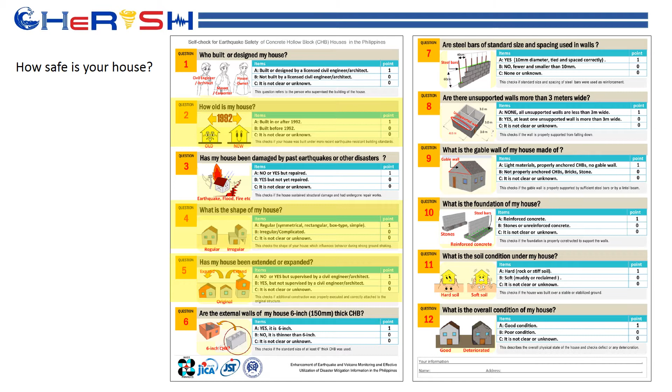At the end of the survey, an assessment is offered about how our houses will perform during an earthquake. Additionally, a recommendation is offered to make our houses ready for an earthquake occurrence. So if you get a score of 11 to 12 points, it may imply that your house is safe for now. But for verification, you are still recommended to consult experts.

If the score is from 8 to 10, it basically implies that your house might require strengthening. So to confirm this, you will also have to seek consultation from experts. And when your score for your house is only from 0 to 7 points, then you have to be alarmed. You really need to see an expert soon so that strengthening recommendations and modifications can be made.

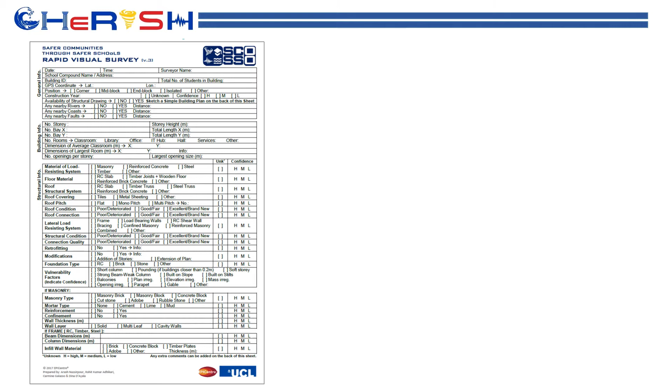Here's another example of a rapid visual survey. This rapid visual survey, or RVS, was applied to public schools in the country in a project that involves the University College of London, or UCL, De La Salle University, and Xavier University in Cagayan de Oro. DLSU and UCL are among the main collaborators of the CHeRiSH project.

So what is a visual survey? A rapid visual survey, or RVS, is an affordable and fast procedure in assessing the safety of a structure during a hazard event. It enables the classification of structure according to risk it may pose when subject to different hazards. So what's the objective of RVS?

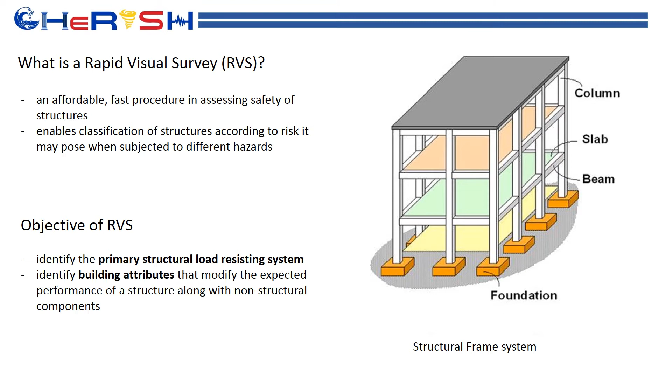It aims to identify the primary structural load-resisting system of a structure. These are beams, columns, and slabs, and foundations. It also identifies building attributes that modify the expected performance of a structure along with non-structural components.

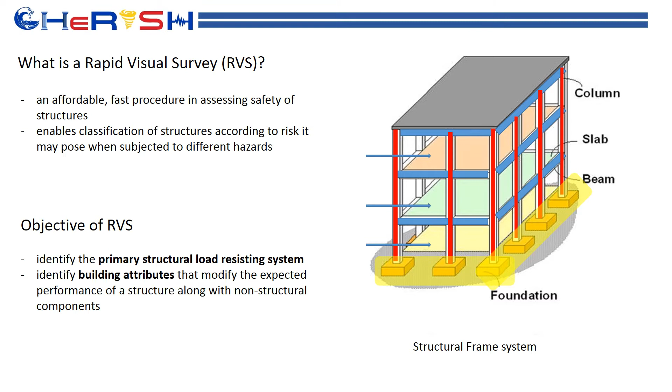So here's an example of a building attribute that affects the performance of a structure. That is the construction of a structure on a slope. Because the ground where the structure will stand on is not flat, it is required that the structure be supported by poles or long columns, and fewer slabs will rest on ground and many will be suspended.

Due to this layout and structural requirements, some columns will be sized larger than the others, and this results in varying stiffness in columns. Shorter and more stiff columns compared to long ones, the flexible ones, will attract more seismic forces and could fail during a seismic event. This attribute of a structure affects the performance and can only be identified once you have seen the structure on site.

RVS is a tool that enables you to identify these attributes and lets you assign scores to these attributes to know how much compromise they will contribute to the structural integrity.

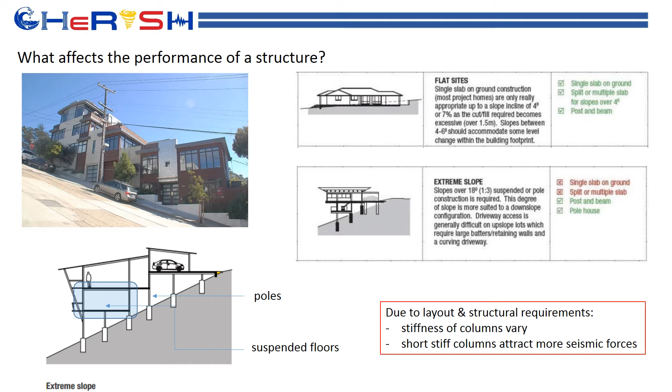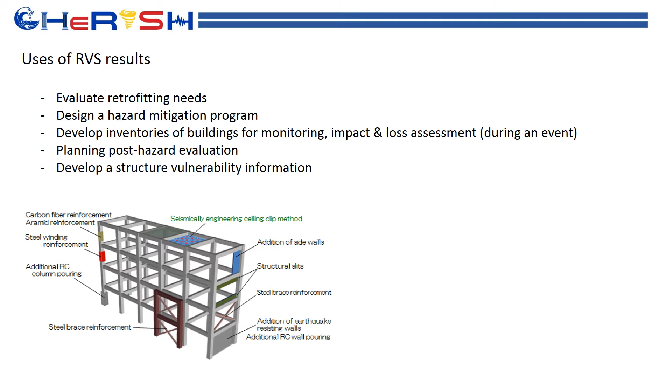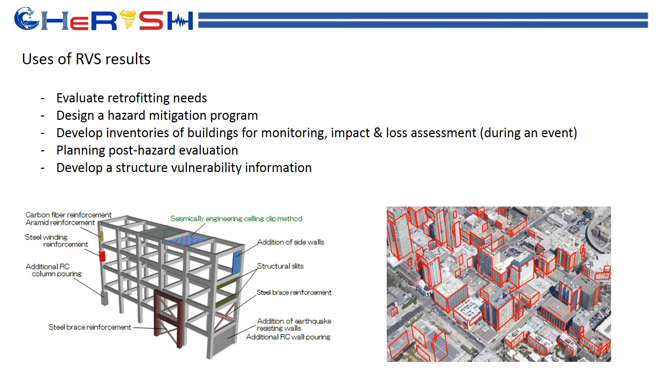RVS allows user to evaluate the needs of a structure for retrofitting, which is a performance improvement against certain hazards like earthquake. From the result of visual survey, one can develop a hazard mitigation program, create inventories of building to be used for monitoring, project impact, and conduct pre- and post-event loss assessment. One can also plan post-hazard evaluation and can develop a model for performance of structure in terms of vulnerability.

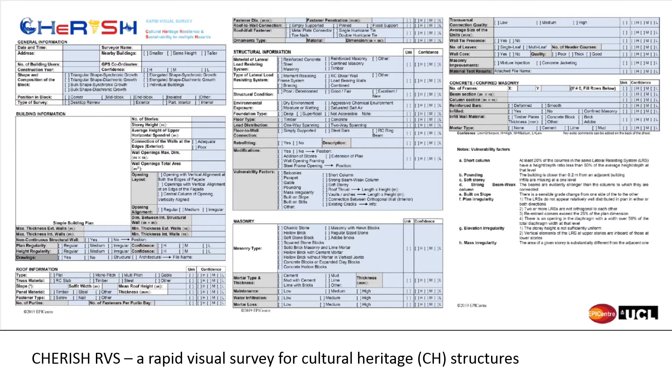CHeRiSH Rapid Visual Survey, like what you see on the slide right now, is a rapid visual survey catered specifically for cultural heritage structures. And this CHeRiSH RVS is the one that was used in conducting a rapid visual survey for CH structures in Calle Real, which was conducted in July 2019.

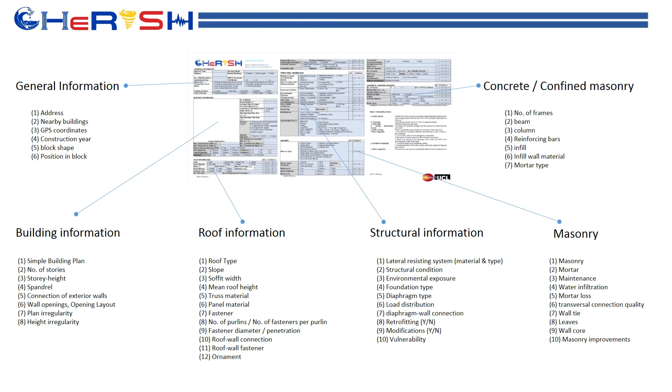So the CHeRiSH RVS has the following parts: general information, building information, roof information, structural information, masonry, and concrete or confined masonry. General information aims to identify and locate buildings, which is an important basic information.

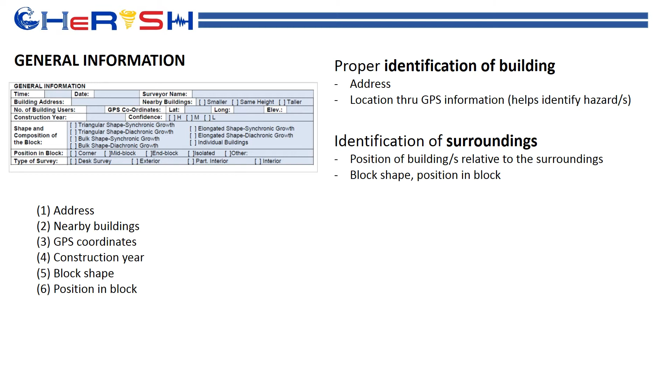This can be achieved by providing the address and the location through GPS. Surroundings must also be described, such as nearby buildings, description of buildings adjacent to the structure being assessed, block shape and position on the block, and determining the time of construction. Some of this can be done before going on site.

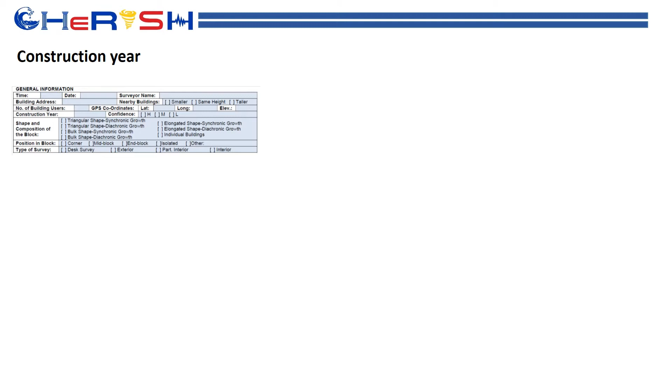Construction year. The age of the building is tied to design and construction process or practices. By knowing when a building was constructed, one can tell the basis for the design of the structure. One can also identify the construction process during the time of construction. By knowing this crucial information, an expert can determine if a structure is adequately designed to withstand a particular hazard, such as earthquake. The demand from a structure for an earthquake, for a structure constructed before 1970, is different from a structure constructed recently. So all structures must be evaluated based on the demands of loads, based on the current code.

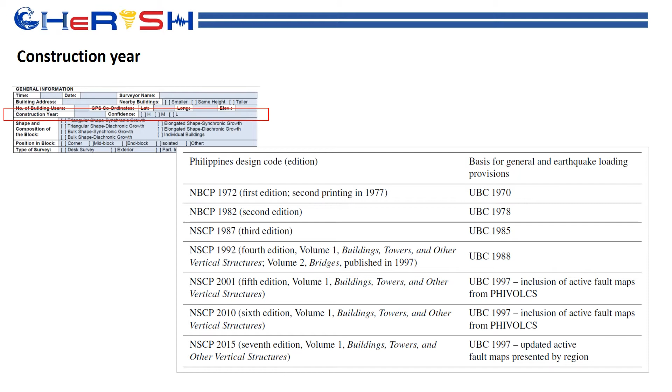Block shape. This information confirms the address or location of the site. This also provides information that can support items in the latter portion of the RVS, for example, pounding due to adjacent buildings.

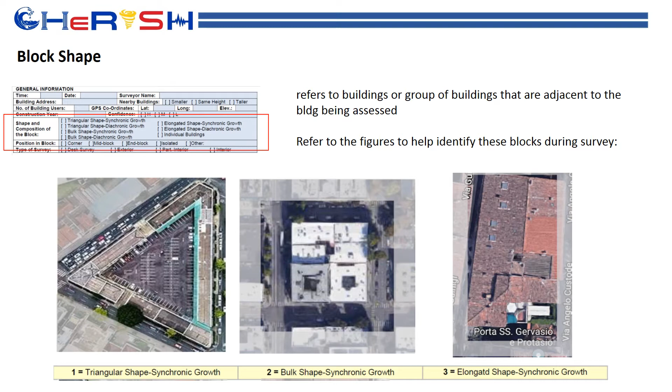If the buildings are constructed individually and separately, then you can also identify that to be individual buildings, under classification number 7. So you can use the following visual aids to answer this particular item.

Next is building information. This information requires a simple building plan, number of stories, story height, spandrel, connection of exterior walls, wall openings, opening layout, plan irregularity, height irregularity. This part provides an overview of building configuration, like how tall the building is, how the building looks when viewed from above, whether there is plan irregularity, etc. It also identifies building attributes which can be observed from the street that affect the performance of the building, for example, opening layout, facade irregularity, height irregularity.

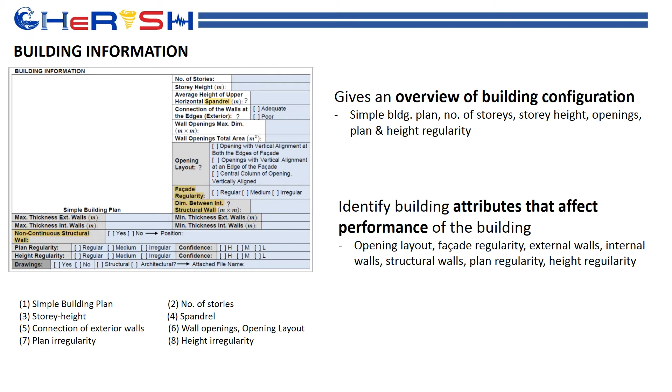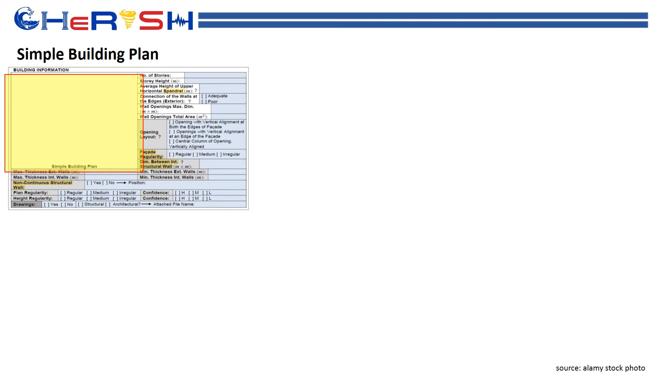Simple building plan. This could be a skillful sketch of a building or a simple floor plan drawing, but both share information that reveals some of the basic geometric features of the structure, which may have an influence on structural performance.

Stories or story height. The number of stories or story height has to do with the height of the building, of course. Damage to a building is somewhat influenced by its height, and this information is a good indicator of a building's height.

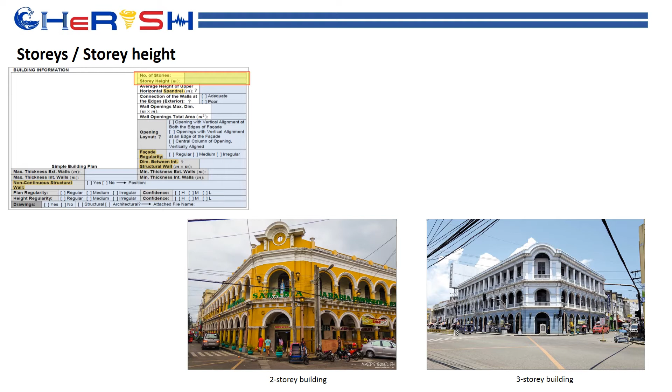Spandrel. Spandrels are technically beams. In areas where there are openings, spandrels are the ones carrying the weight of walls above the openings. Without it, walls will have no support and could fall off. So how to detect it? Find a portion of the masonry wall between two vertical openings, the one that connects two vertical piers — most likely that will be the spandrel.

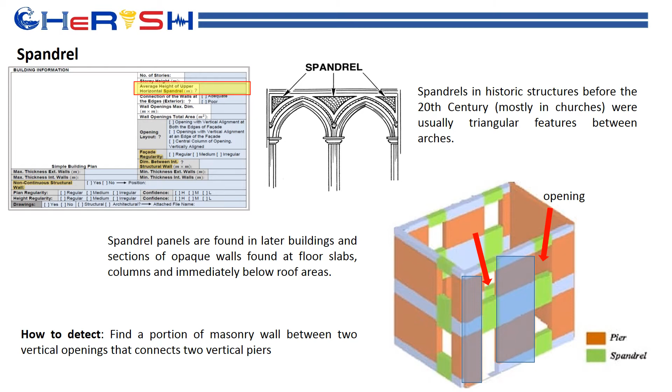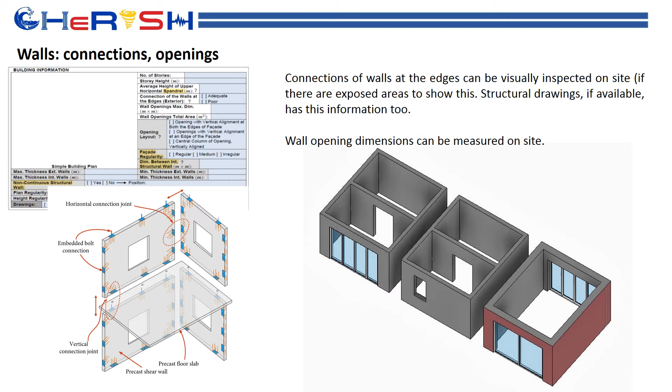Walls, connections, openings. Connections of walls at the edges can be visually inspected on site if there are exposed areas to show this. Structural drawings, if available, have this information too. Wall opening dimensions can be measured on site.

Facade is the front face of a building. A facade is said to be regular if the spacing between windows and door openings is equally spaced apart.

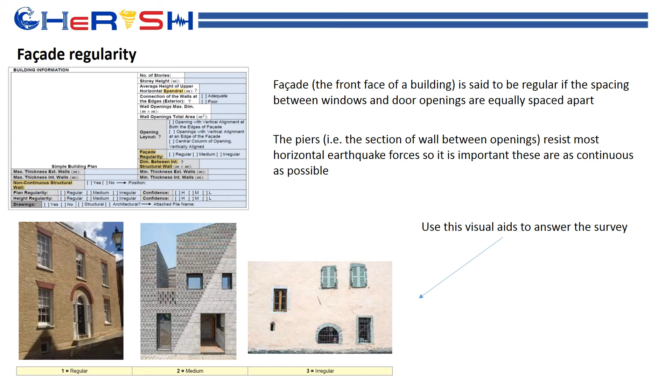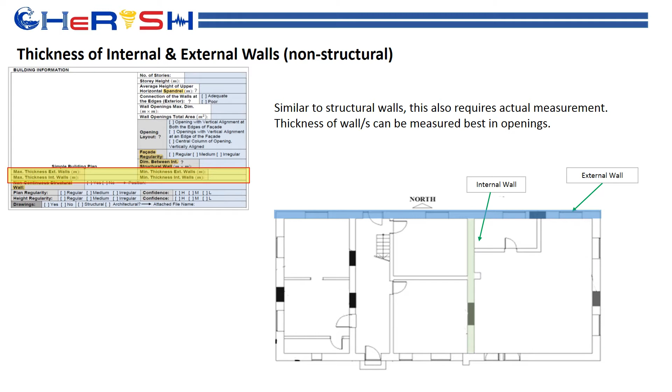External walls run along the periphery of the structure, while internal walls normally set the partitions in a building. This item requires the thickness of these two components. Note that walls can best be measured at openings, for example doors. When you open a door, a portion of the wall gets exposed and you can measure the thickness from there. In windows, walls can also be exposed in those areas, so you can also measure the thickness of the wall from openings like windows.

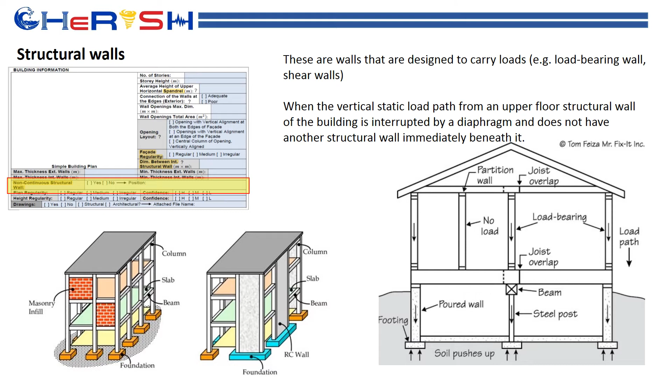Structural walls are walls that are designed to carry loads, examples of which are load-bearing walls and shear walls. This item seeks to identify if there are vertical static load paths from an upper floor of the building that is interrupted by a diaphragm and does not have another structural wall immediately beneath it. Take a look at this figure. When the vertical static load path from an upper floor is interrupted by a diaphragm, as seen in the picture on the left, and does not have another structural wall immediately beneath it, as illustrated by the picture on the right, you will have to answer this portion in the RVS. You can refer to this visual aid to say whether the structural wall is continuous or not.

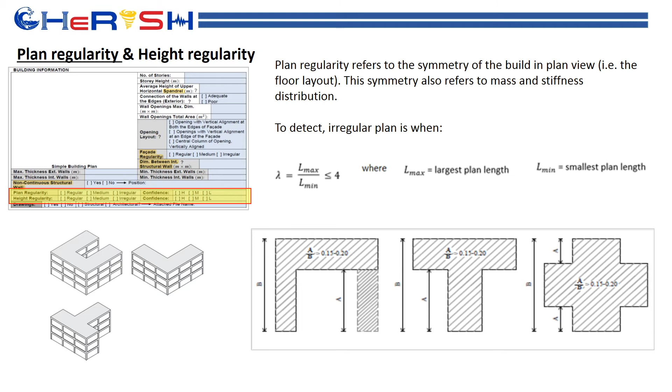With respect to height regularity, similar to facade irregularity, there should be no disruption due to irregularity or discontinuity of vertical structure layout. This irregularity can be assessed based on the elevation view of the building and consistency of mass and stiffness with height. To answer this portion in the RVS, you will say either it's regular, medium, or irregular. Regular is where story heights are uniform in a building. Medium is when story heights are different, with the difference between floor heights less than 0.5 meter. But it is considered irregular if the difference between floor heights exceeds 0.5 meters.

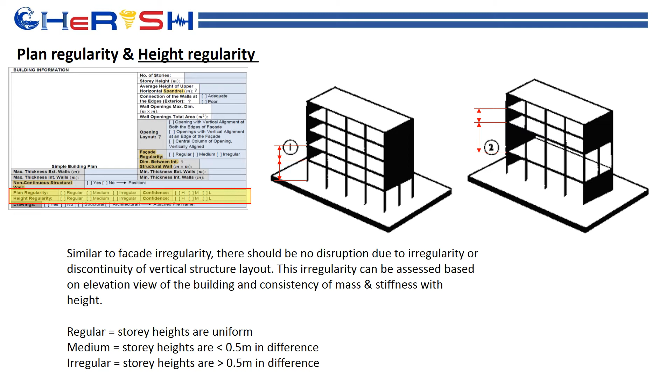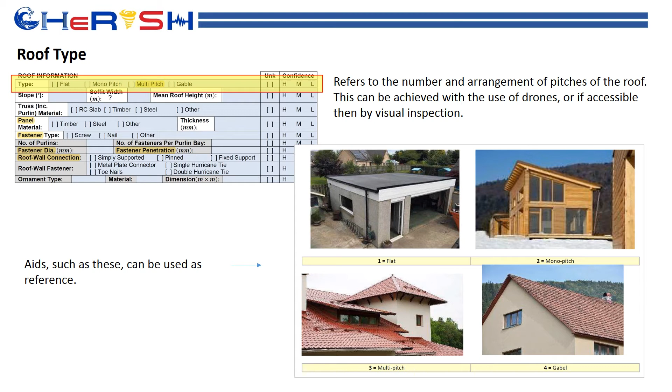The first item being asked in this portion is the roof type. You will answer this item as the roof being flat, as shown in this figure, or mono-pitch, meaning the inclination of the roof is only on one side. But if it is on several sides, then the roof is multi-pitch. And lastly, if it looks like this in figure 4, then you say gable. So visual aids such as this can be used as a reference. Answering this item can be achieved if accessible by visual inspection. Otherwise, you may use pictures taken by drones and judge from those pictures the type of roof that a structure has.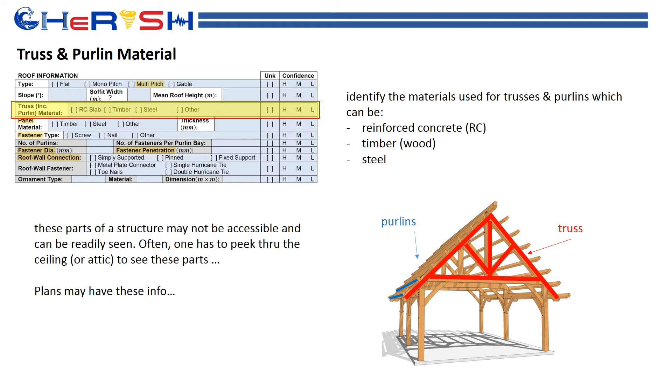For the panel material, this item identifies the material used for roof panels, which can be timber or steel like GI sheets or others, because some use solar panels for their roof while others use clay tiles.

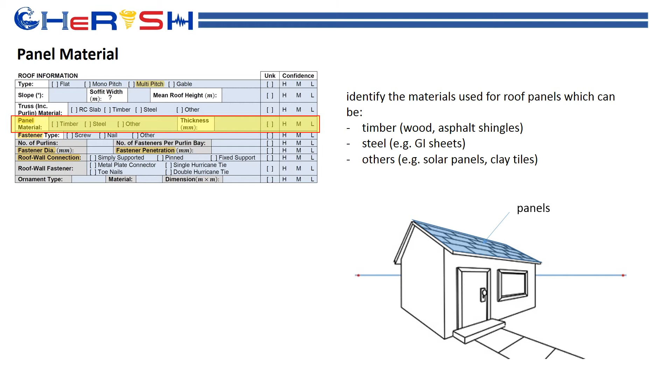Fasteners are tools that connect the components of roof. So GI sheets get connected to purlins by fasteners. Fasteners can be screws, they can also be nails.

Inspecting this may require access to the roof. So it will be more convenient if plans are available, because you will simply have to check those materials from the plans.

But when accessible, one can check the size of these fasteners, and you may be able to correlate the size with the depth of penetration that these fasteners go. So that's how to answer this particular portion of the RVS.

For connection of roof to the wall, it describes the level of fixity of roof to wall through the type of connection. Timber truss is usually pin connected. So if the truss used in a structure is made up of wood, then its connection will be described as pin connected

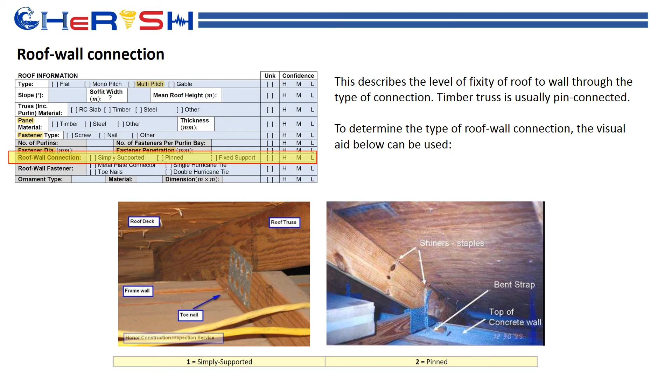Roof-wall fasteners. This pertains to the material used to connect or fasten the roof to walls. To determine the material used, the following visual aid can be used. This can be inspected through the attic or ceiling, but may require permission from the owner. The difference of this from the previous item is that this identifies the material used to fasten the roof to the wall, while the previous one identifies the type of connection—whether it's simply supported, pin connected, or fixed supported.

And then lastly, for this section, the ornaments. Ornaments are typical for cultural heritage structures. This feature, however, poses risk because during an event, let's say an earthquake, these ornaments may fall and may pose risk to

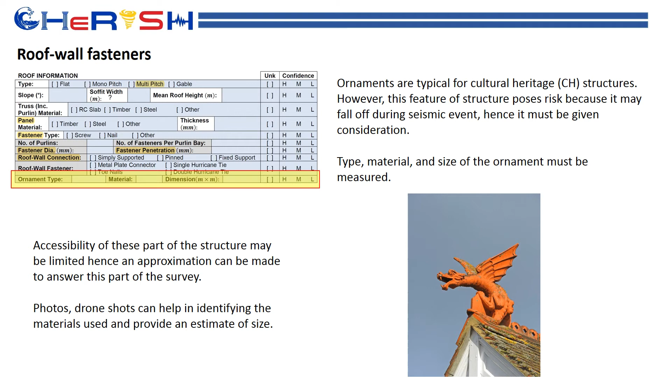So structural information, this aims to identify the structural system, which could be the lateral load resisting system and the material used for this. It also identifies the attributes that affect structural performance, such as the condition of the structure, the type of foundation being used, if there are diaphragms, and the way that these diaphragms transfer loads to adjacent beams, connection of parts, and vulnerabilities.

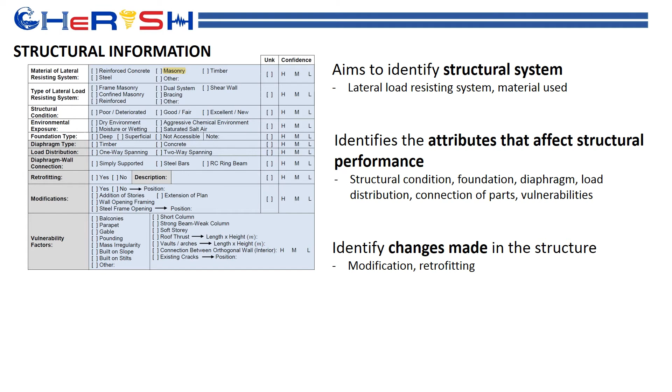It also aims to identify the changes made in the structure. Has the structure been modified? Has the structure been retrofitted? So this particular section will be aiming to answer those items.

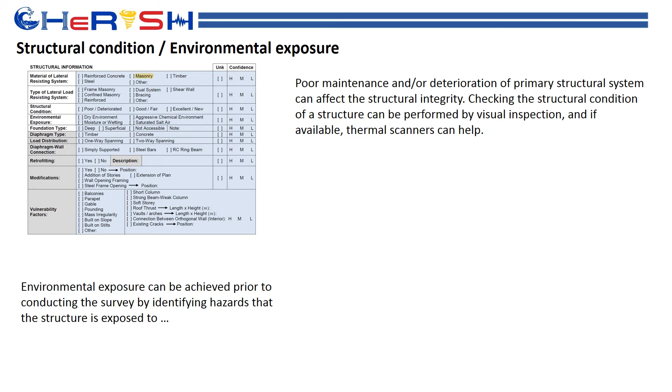For structural condition and environmental exposure: poor maintenance and deterioration of the primary structural system can affect structural integrity. Checking the structural condition of a structure can be performed by visual inspection, and if available, thermal scanners can help. Here's a visual aid. This visual aid can help us assess this part. One can tell whether the deterioration will significantly affect the performance, or it will only moderately affect the performance, or will not affect the performance at all.

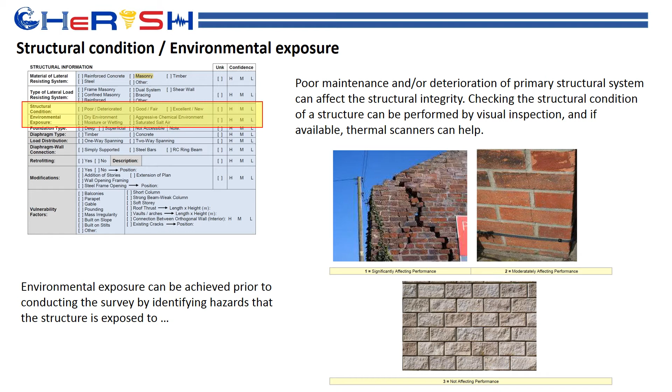Environmental exposure, on the other hand, can be assessed prior to conducting the actual site survey, as hazards can be identified through desktop survey. Nearby main water source can be identified. Distance from fault line can also be identified prior to on-site inspection.

Foundations are structural members that transmit the loads carried by the structure to the ground where the structure sits. So depending on soil quality, foundations can be shallow or deep. This may not be visible on site, but if plans are available, one can tell the foundation type. Diaphragms can be identified through site inspection and similarly, if available, through plans.

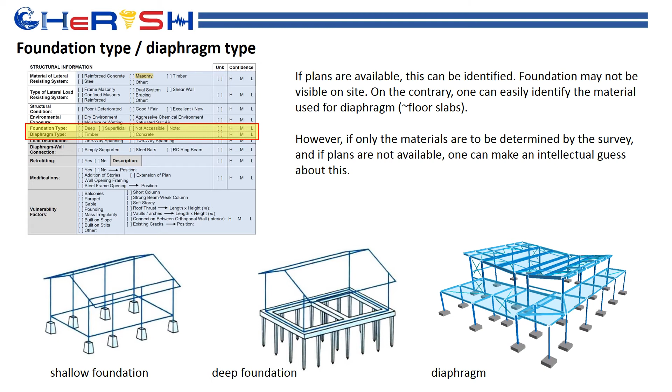Load distribution concerns how floor loads are distributed to the nearest or adjacent beam. Load can be directed in two directions - we also call it two-way slab - or through one direction only. So this can be determined by visual inspection if dimension length disparity is obvious, but a simple calculation can verify if the slab is one-way or two-way.

Take a measure of the dimension of the slab along the longer direction compared with the shorter direction. If the ratio between the longer direction and the shorter direction exceeds 2, then the slab is categorized as one-way, and the manner that this type of slab distributes the load to the beam is through one direction only. Otherwise, it's a two-way slab.

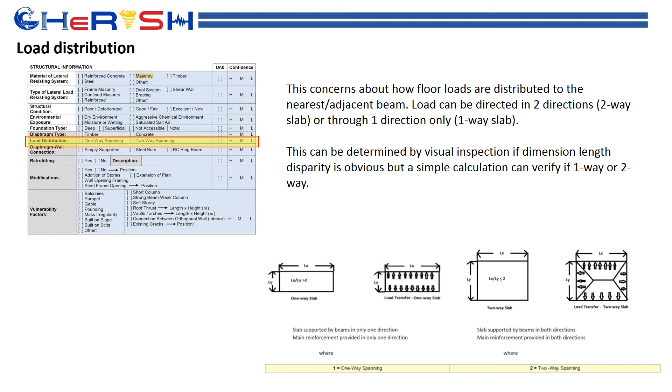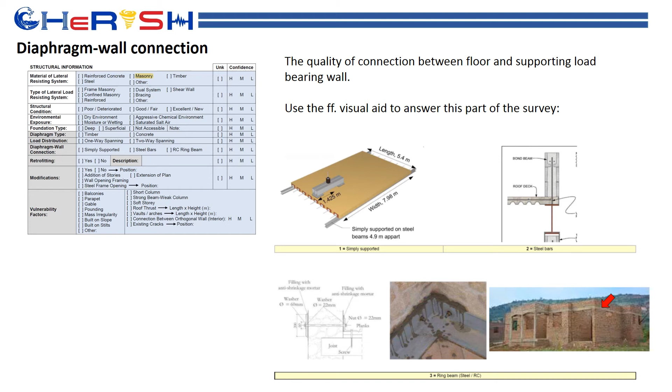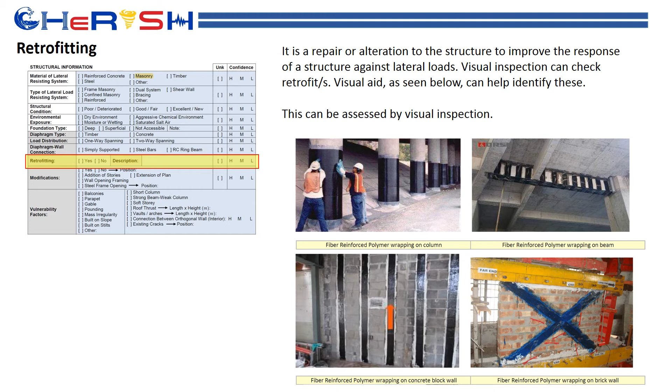Modifications, unlike retrofits, are additions to the structure, but they don't have the intention of improving the response of a structure against loads. In fact, many of these modifications even compromise the integrity of the structure. These modifications can also be assessed by visual inspection, and we might be able to see some of this.

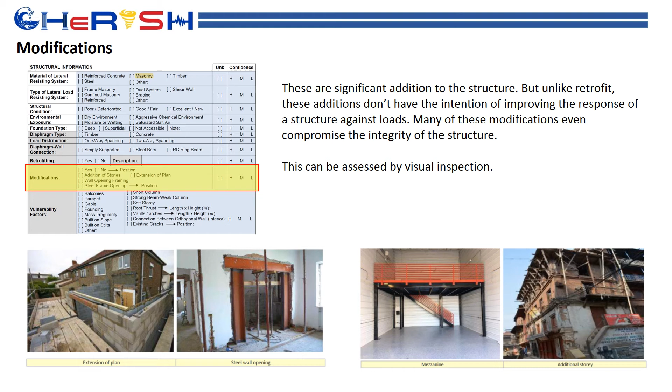Examples include extension, opening on walls, addition of mezzanine, and addition of a floor or story.

Vulnerabilities are considered to be the weak aspects of normal construction techniques that will compromise the integrity of the structure when subject to lateral forces. One can detect this from architectural or structural plans or by conducting visual inspection. Some of the vulnerabilities taken into consideration in this rapid visual survey are the following: a balcony,

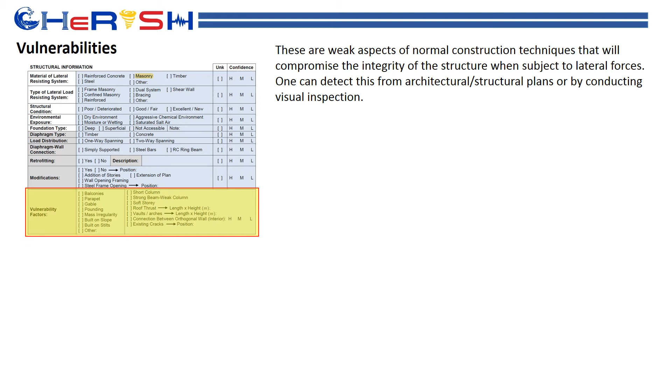parapet. A parapet is a portion of exterior walls that extends above the roof. This can break during an earthquake and may fall on the roof or onto the street.

Gable walls are normally not braced, therefore vulnerable to out-of-plane failure. These walls provide support for the roof, and their failure can result in partial collapse of the structure.

Mass irregularity: for example, if a particular story is being used for storage compared to other floors which don't have the same function, there's a difference in mass between that specific floor compared to others. That is considered to be a vulnerability. And structures built on stilts.

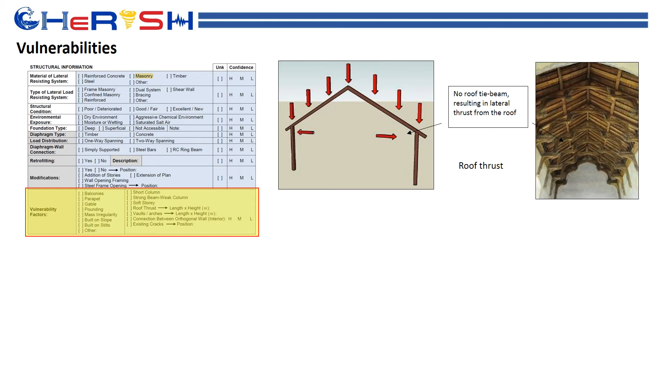Additional vulnerabilities could come from roof thrust, as shown here in the picture above. Roof thrust happens when there's no roof tie beam, no beam that connects trusses. Without these tie beams, lateral loads are additionally applied to columns as a result of this thrust from the roof.

Vault or arch is also a vulnerability, and so is the connection between orthogonal walls. If the connection is bad, then that's a vulnerability. Otherwise, the connection is okay. But there's a need to identify whether the connection is bad or good.

Cracks are a manifestation of an impending failure of a structure, so it is important for us to identify this, including the locations. Cracks are more critical if they occur along structural members. But if cracks are present along or on walls that don't function structurally, then they can be repaired.

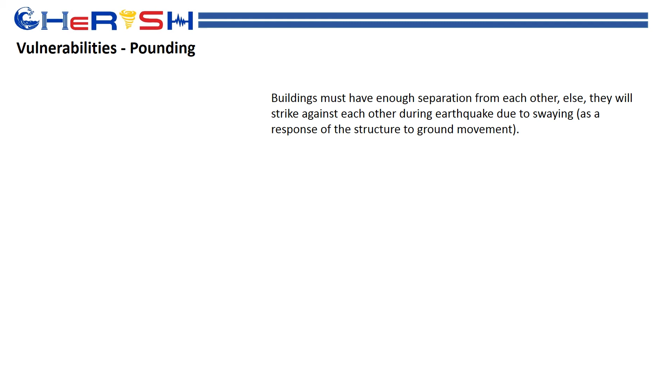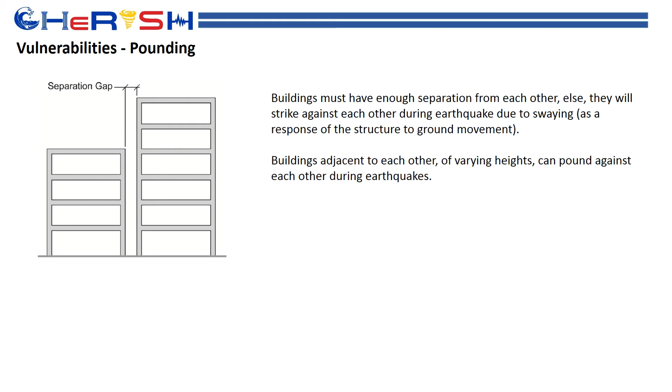Another vulnerability is pounding. Buildings must have enough separation from each other, else they will strike against each other during an earthquake due to swaying as a response of the structure to ground movement. Buildings adjacent to each other of varying heights can pound against each other during earthquakes. Pounding must also be considered if buildings are at the end of the block.

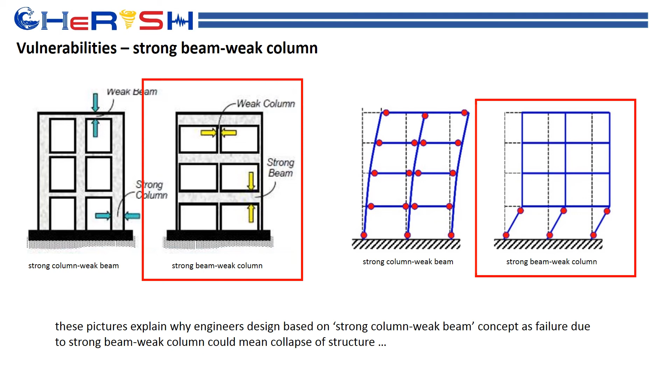When one floor is weaker, that means that floor is less stiff than others. It can be manifested by having fewer walls or columns compared to other floors. So that will be classified as a soft story. We have here several pictures that describe a soft story.

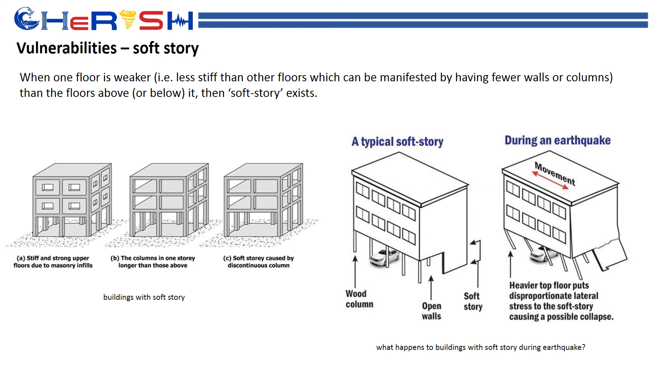So what happens to buildings with a soft story during an earthquake? This picture on the right depicts the response of a structure with a soft story during movement in an event of an earthquake. Because top floors are heavier, it puts disproportionate lateral stress to the soft story below, causing a possible collapse.

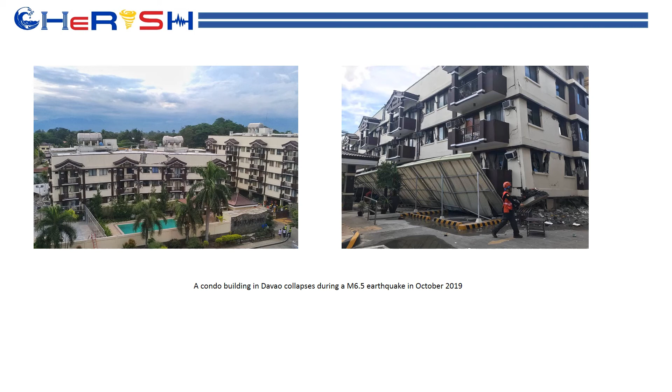So these are actual buildings that collapsed during earthquakes because of soft story. We don't have to go far, as one condominium building in Davao collapsed in October 2019 due to soft story as a magnitude 6.5 earthquake hit the province. I'm sure you have heard about this on the news.

Another section is about masonry. It identifies the material used for masonry, such as masonry mortar. It also identifies the condition of material used for masonry. To identify the condition, it checks for maintenance, water infiltration, mortar loss, improvements, and material testing conducted. It also establishes the degree of anchorage, the amount of connection of masonry to the building, asking about the connection quality and if there's a presence of wall ties.

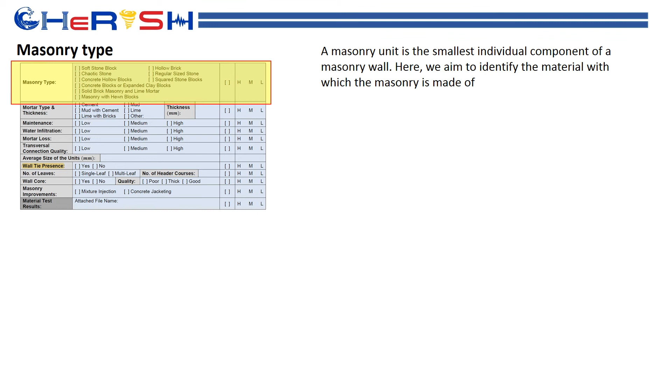So masonry type. A masonry unit is the smallest individual component of a masonry wall. Here we aim to identify the material with which the masonry is made of. It can be a soft stone block, chaotic stone, regular sized stones, concrete blocks, or expanded clay blocks, among others.

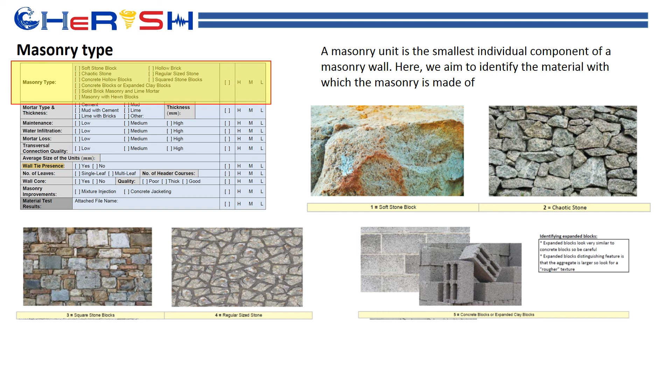Typically in the country, we're using concrete hollow blocks. But for cultural heritage structures, structures could be made up of hollow bricks or solid brick masonry and lime mortar, and then masonry with hewn blocks.

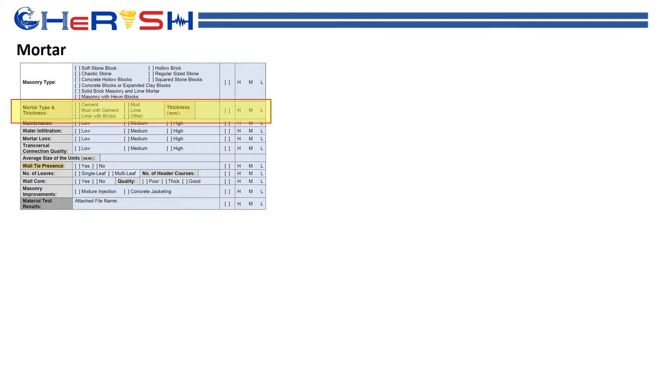So mortar will ask about what type of material is being used as mortar. Mortar is used to fill the gaps between bricks and blocks. It is a mixture typically of sand and a binder such as cement or lime, then added with water and applied as a paste, which then sets hard. So mortar can be cement, mud, or lime.

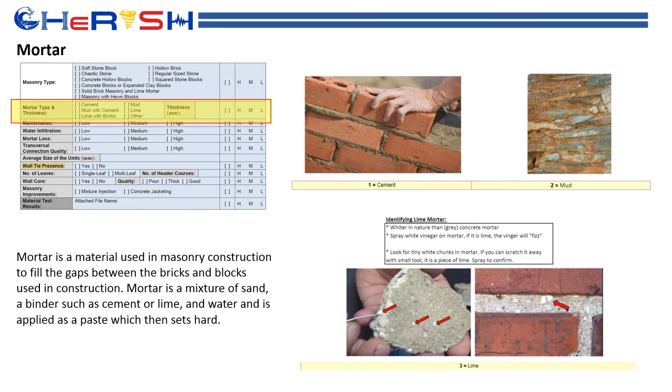Unless a maintenance record is available, maintenance can be judged by simply visually inspecting the target structure. One can judge easily if a structure is well maintained, not well maintained, or deteriorated. So you can say maintenance is low, medium, or high for this particular item in the RVS.

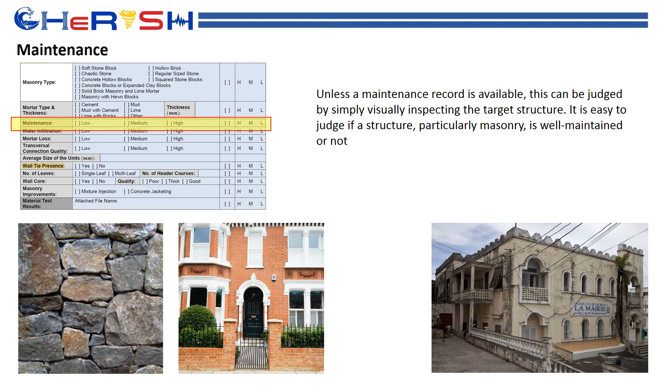Water infiltration is the amount of water that seeps through the building envelope to the interior of the building. Visual aids such as this can be used to identify the areas where water infiltration has occurred. You might be able to observe painting or coating damage, water stains, loose cladding, rotting trim, falling debris, cracking or spalling, and efflorescence.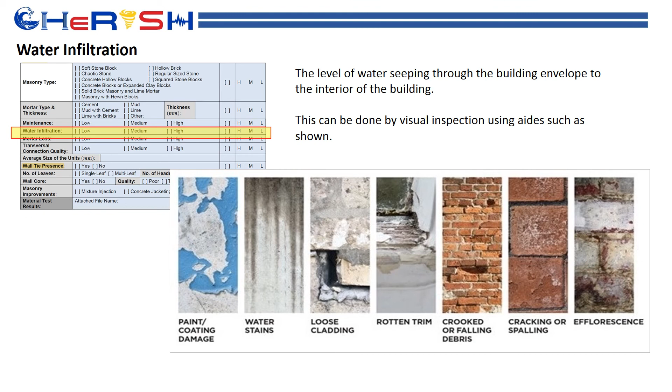The transversal connection quality, including wall cores and masonry improvements, for masonry walls with multiple leafs, cavities, or infilled core or layer, refers to the connection between two leaves or two layers of the wall. This can be through grouted steel pin, header course between the leaves, tie rod, or wall ties.

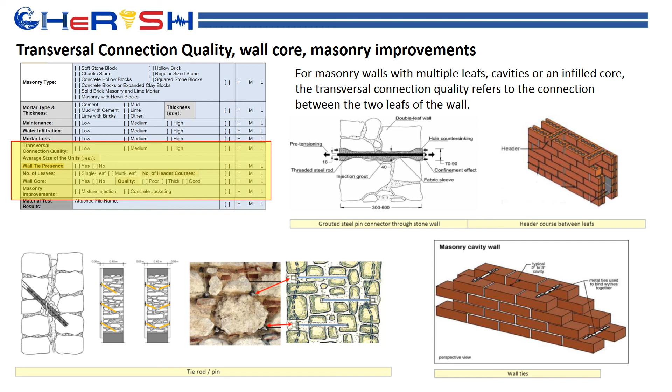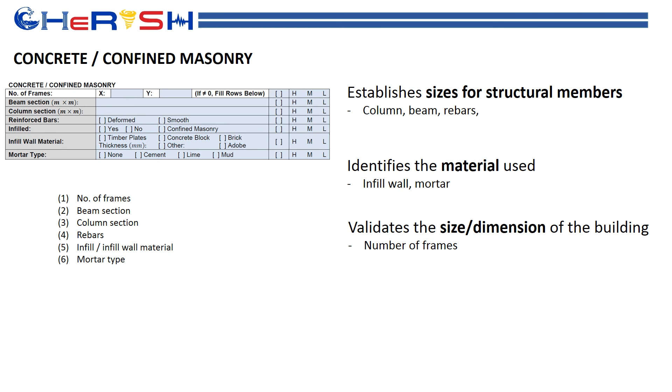And the last section is about concrete and confined masonry. Here it establishes the size of the structural members such as columns, beams, and the reinforcing bars used. It also identifies the material used for infill wall or mortar, and then validates the size or dimension of the building by asking about the number of frames.

But before we start with the components of this particular section of the RVS, let's differentiate concrete versus confined masonry first. Confined masonry is a construction system where the walls are built first and RC columns and beams are cast afterwards, while typical in our country is when the RC frame is constructed first, so the columns and beams are constructed before the walls.

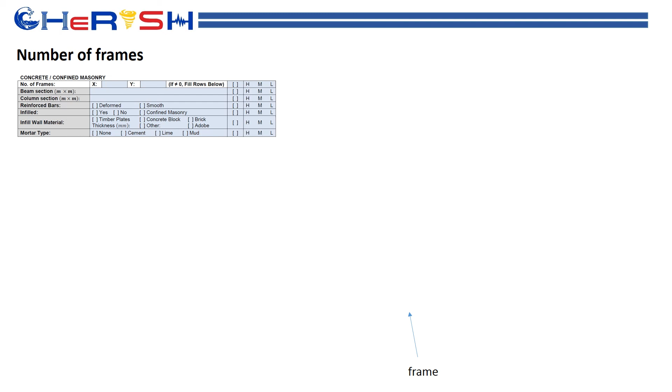For the number of frames, this is a structure that will be used for us to define what a frame is. Under this section, the first item is about the number of frames. Simply count the number of frames during inspection. For this particular example, we have 1, 2, 3, 4, 5, 6, 7 frames.

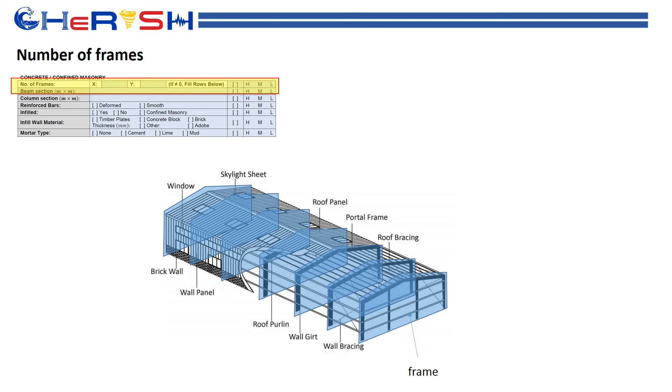Now for beams, columns, and rebars, dimensions of beams and columns can be measured on site if plans are not available. To determine if rebars are corrugated or not, one can check the structural drawing. Observing this on site may be difficult, so the size of the rebar can be checked from the structural drawing, but the presence of corrugation requires physical inspection. It might be difficult to observe this on site unless the structure is heavily deteriorated, such that a portion of rebars in some structural members are already exposed.

Regarding infill walls and mortar type, infill walls in the country are typically concrete hollow block walls. Though for cultural heritage structures, some may have used bricks or adobe, but these are typically considered non-structural. As differentiated earlier, confined masonry versus RC frame with masonry infill, we can answer whether the structure is infilled or not. The material used for infill can be determined through inspection, and similar can be said about mortar type.

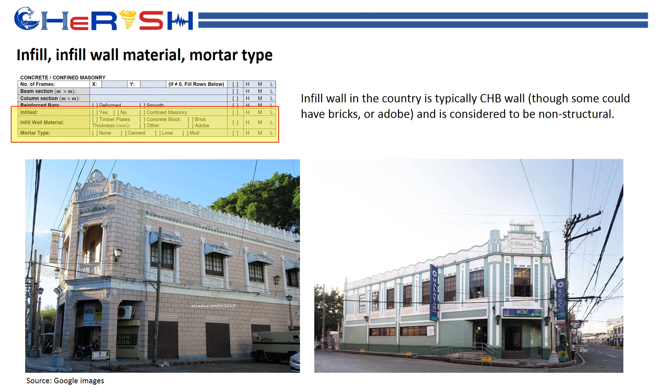So here is an example of a rapid visual survey for one of the structures in Calle Real. The building is identified to be 1001. I have made a mistake here - this sample RVS is not for 1013, but for 1001 actually.

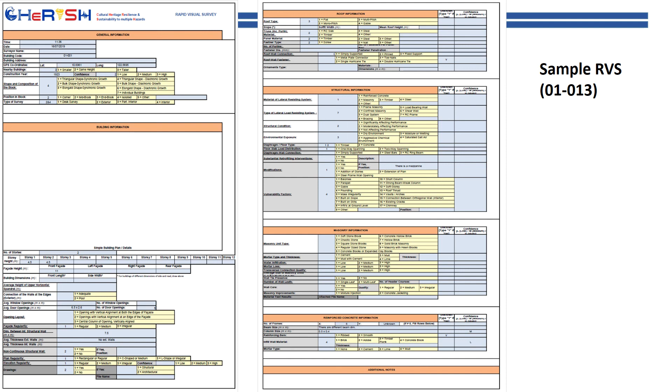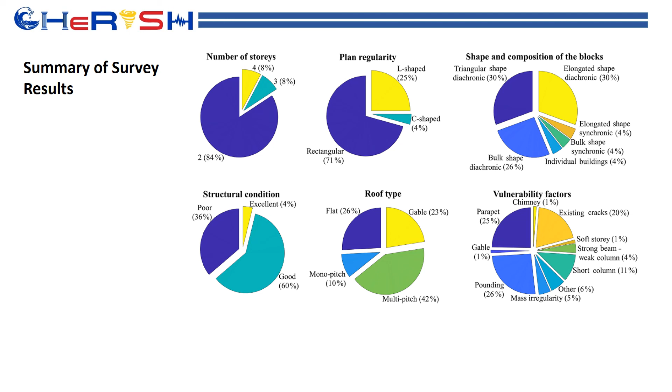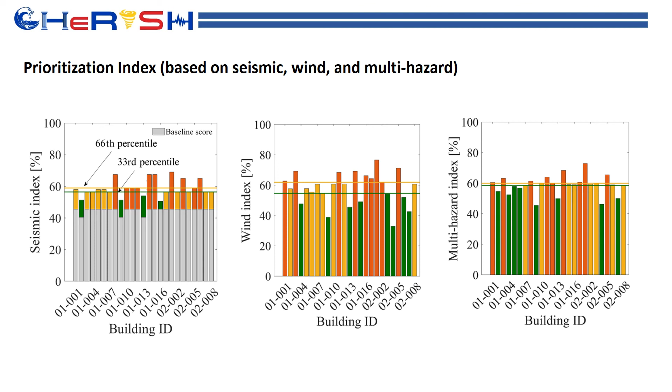So the collected data from RVS of all 25 structures in Calle Real were used to develop a prioritization index, or indices, as summarized in the graph shown here. These are the prioritization indices for all 25 structures in Calle Real, considering earthquake in this graph on the left, wind, and then the combination of wind and earthquake for this graph on the right.

For seismic prioritization index, the figure shows nearly similar baseline scores. This can be attributed to the similarity of some construction features of the structures in Calle Real - most are reinforced concrete frame structures, all constructed before 1970, while the building code in the Philippines was instituted in the 70s. Common vulnerability factors such as pounding and degradation have also been observed. Only 4 assets fell below the 33rd percentile.

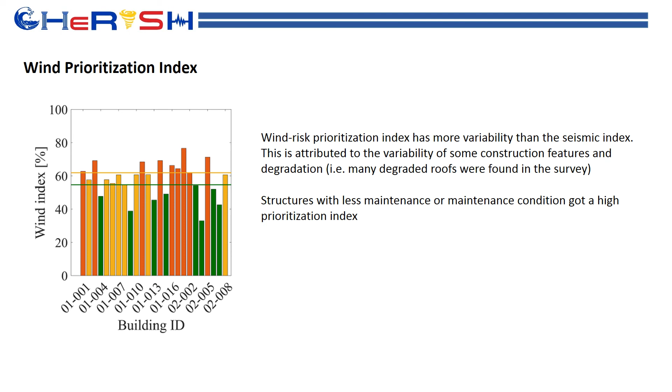Regarding the wind prioritization index, the wind risk prioritization index has more variability than the seismic index. This is attributed to the variability of some construction features and degradation. Many structures have degraded roofs as found in the survey. Structures with less maintenance got a high prioritization index.

Combining the results from seismic and wind leads to the development of the multi-hazard prioritization index. This graph clearly shows that the wind hazard played a significant role in determining the prioritization scheme for CH structures in Calle Real. Observe the similarity between the two prioritization graphs - parehong behavior.